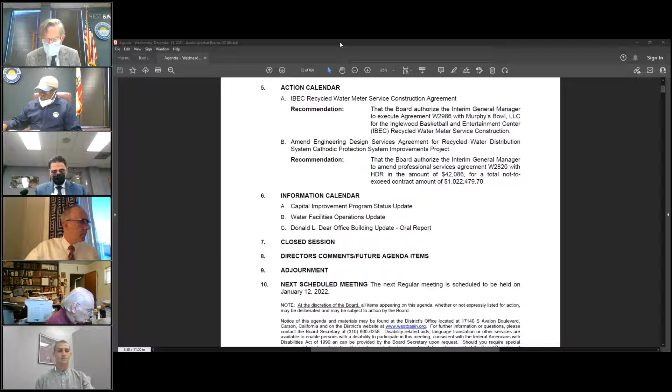Okay, let's move on to the action calendar. And the first item up is the Inglewood Basketball and Entertainment Center Recycled Water Meter Service Construction Agreement. So we will have a presentation on that, Mr. General Manager. Yes, Chairman Alvarez, I'm very excited about this item. As you mentioned, it is related to the Inglewood Basketball and Entertainment Center in the city of Inglewood. Obviously, West Basin is always working with our communities to expand the use of recycled water. And for this item, action item 5A, which begins on packet page 3, we do have Jeremiah Shea, who's our operations analyst, here for the presentation.

Thank you, EJ, and good evening, directors. I'm happy to present this action item for the committee today. We believe this is an exciting opportunity for the district to expand recycled water use in the city of Inglewood. And with that, I will jump right into it. So the Murphy's Bowl LLC is a developer associated with the Los Angeles Clippers basketball team. They have approached West Basin and asked us to provide a new recycled water service connection for the future Inglewood Basketball and Entertainment Center, or the IBEC site in the city of Inglewood. Recycled water is proposed to be used at the site for outdoor landscape irrigation, to supply cooling towers, and also for toilet and urinal flushing for a new recycled water annual demand of 40 acre-feet per year in the city of Inglewood.

In order to provide recycled water to the IBEC site, a new 8-inch diameter pipeline service connection must be constructed from the district's existing 36-inch pipe on Prairie Avenue. A map showing the location of this project is included on page 17 of your packet if you'd like to reference that. Due to the project's accelerated timeline with construction already underway in 2021, the developer has offered to perform the design and construction of the new service connection and also to pay for the expenses for the design and construction, with West Basin to provide design review and construction inspection services to ensure that the new service is constructed per West Basin standards.

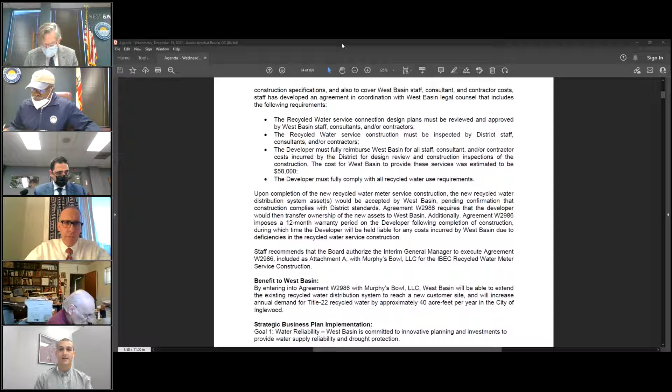Okay, thank you very much. President Williams, do you have any questions? Yeah. My mic. There it is. Is my mic on now?

Okay. It is. Yeah. And this project sounds like it's in alignment with what we want to do and with our recycled water system. The more customers we can get. What is the annual demand on this site? For all the recycled water use, right now we're estimating about 40 acre-feet per year, so it is a significant new demand in Inglewood. Yeah, well, I would definitely support staff's recommendation. That's all. Anything else? That's it. Any board members have any questions or comments?

Okay, so hearing none, my only question is really reiteration. I believe you said that all of the costs are going to be covered under the development agreement by the developer, and it's estimated at $58,000. But if they go over that, so be it. They'll still be covered. Correct.

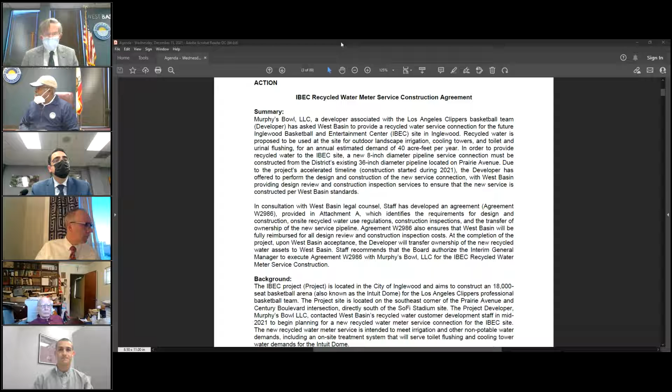Yeah. At the end of the project, we would submit all of our costs to the developer, and they would be fully reimbursed, even if that number is above the initial $58,000 estimate. All right. With that, then we will move this forward to the board. I concur. Okay. Thank you.

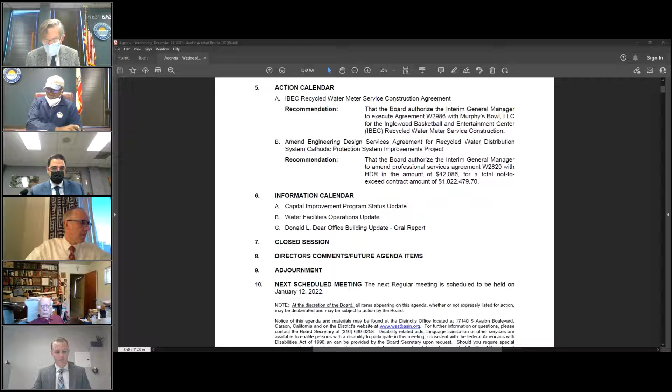Thank you. So next item is another agreement. This is an amendment to the engineering design services agreement for the recycled water distribution system cathodic protection improvement project. So, Mr. General Manager, do you want to tell us about that project? Yes, thank you very much, Mr. Chairman. As you mentioned, the item before you is item 5B, which begins on packet page 29.

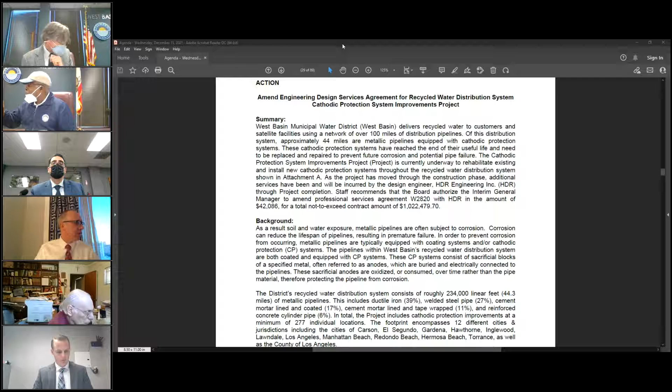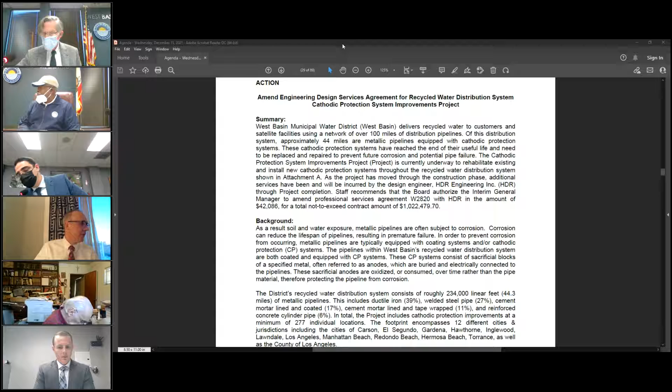The item is intended to amend an engineering design services agreement for recycled water distribution systems, the cathodic protection system improvements project. For this presentation, we do have Kevin Cullen, our engineering 2 project manager. Thank you, EJ. Good afternoon, Chairman Alvarez, members of the committee and board. As EJ mentioned, I'll be providing a recommendation to amend our existing engineering design services agreement with HDR Engineering for our recycled water distribution system cathodic protection system improvements project.

Before I dive into the memo, I'll just provide a quick high-level overview of what a cathodic protection system is. Essentially, a cathodic protection or CP system is a corrosion protection system. There are 2 types of cathodic protection systems, either an impressed cathodic protection system or a passive cathodic protection system. West Basin's recycled water distribution system is equipped with passive or galvanic anode cathodic protection systems.

These systems consist of sacrificial blocks of a specified metal, in our case magnesium, often referred to as anodes, which are buried and electrically connected to the pipelines. So these sacrificial anodes are oxidized or consumed over time rather than the pipe material, therefore protecting the pipeline from corrosion. West Basin Municipal Water District delivers recycled water to its customers and satellite facilities using a network of over 100 miles of distribution piping.

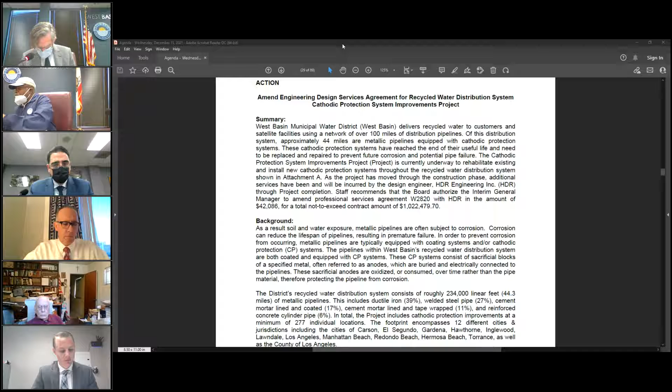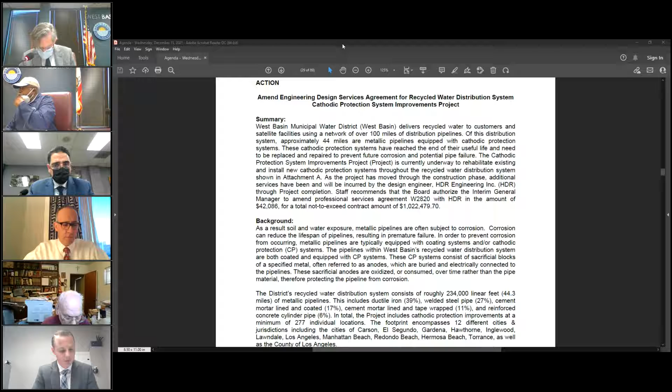In total, the cathodic protection system project improves our CP systems at a total of 277 individual locations and encompasses a footprint of 12 different cities and jurisdictions, including the cities of Carson, El Segundo, Gardena, Hawthorne, Inglewood, Lawndale, Los Angeles, Manhattan Beach, Redondo Beach, Hermosa Beach, Torrance, as well as the county of LA. And a map of the project site and impacted pipelines can be found in attachment A, which is on page 33 of the packet.

A little bit of background in the timeline for the project. The project was first kicked off in 2017 with a testing phase. The goal of the testing project was to gather enough actionable field data to inform a detailed design. So the testing was all completed in 2018. We performed electrical continuity testing, soil resistivity testing, and remaining anode life calculations for all of the existing systems.

Upon completion of the testing project, the board authorized staff to enter into agreement in December 2018 with HDR for the full design of the cathodic protection system project. The scope at that time covered a full range of services, including general admin, detailed site investigations, PDR, permit plan, design submittals at 60%, 90%, and 100%, bid phase services, engineering services during construction, as well as closeout services. The design was underway from January 2019 through August 2020, whereby we completed the design in August 2020.

It is worth noting that in June 2020, amendment number 1 was processed with HDR Engineering for some additional field testing that was not previously performed. This amendment was in the amount of $82,419 and was amended using the previously approved board contingency funding. In February of this year, we issued notice to proceed to a contractor, T.E. Roberts, for the construction of the project, and construction has been underway and progressing well.

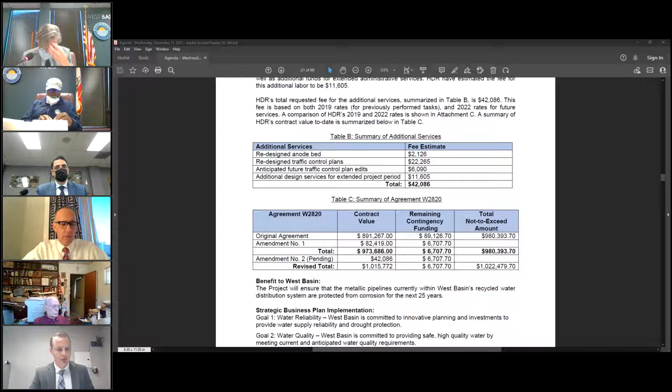As of right now, we are projecting an on-time completion in April 2022. So during the construction phase of this project, some additional services have been performed by HDR. A summary of the additional services can be found in Table B on page 31 of the packet. The additional services performed included a redesign of an anode bed detail, specifically at a location in Hawthorne. We ran into an underground tunnel system, which required the anodes to be laid horizontally rather than vertically.

There was also some training on a document management software that was required for HDR, as well as some traffic control plan revisions as required by the local jurisdictions. In total, HDR's total requested fee for the additional design services, as summarized in Table B, is $42,086. As well, a summary of the agreement W2820 with HDR Engineering can be found in Table C, also on page 31 of the packet.

It is also worth noting that staff does work with consultants to evaluate whether additional services are justified. HDR did inquire about other services as well, to the tune of about $70,000, which were respectfully rejected by staff and deemed to be in scope. So staff has worked with HDR and negotiated the fee for these additional services down, and is what you see before you today. So with that, I will read the recommendation.

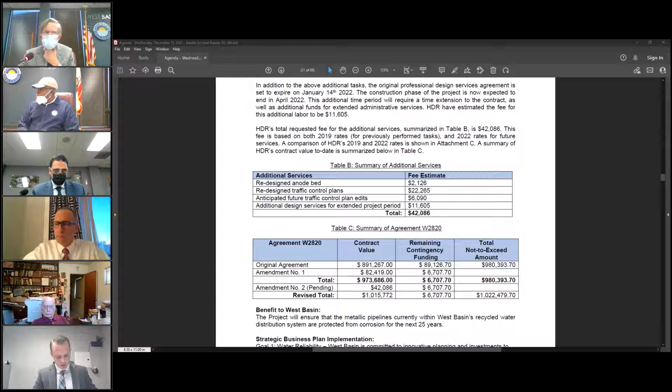The recommendation is that the board authorize the interim general manager to amend professional services agreement W2820 with HDR in the amount of $42,086 for a total not to exceed contract amount of $1,022,479.70. And with that, I'd be happy to take any questions. Okay, thank you very much. President Williams, do you have any questions?

The HDR's agreement, what is that for? Is that design services during construction or construction management services? What is that for? Hey, Director Williams. The existing agreement with HDR is for a full suite of professional engineering design services. So they've been on board with us from preliminary design all the way through design services, including engineering services during construction and closeout services as well.

Okay, now, as I recall back, this project had a CIP number. So where are we with this? Is it still under the same number? Because I didn't see that listed in the report here. I don't see a CIP number for this project.

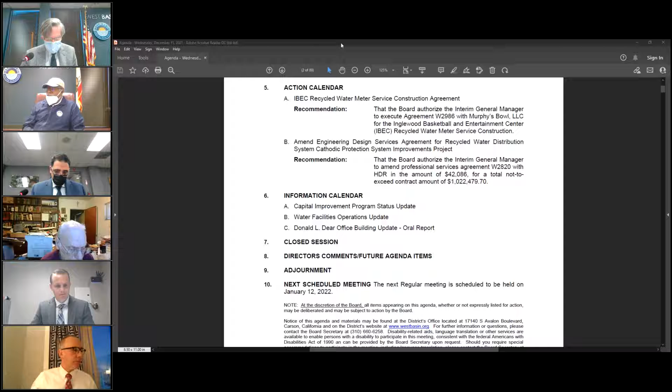All right, President Williams, what's your wish? I would move to staff's recommendation. Okay, so be it. We will then move on to the next item, which is item 6A. And yes, that's information calendar. The first item up is the capital improvement program status update.

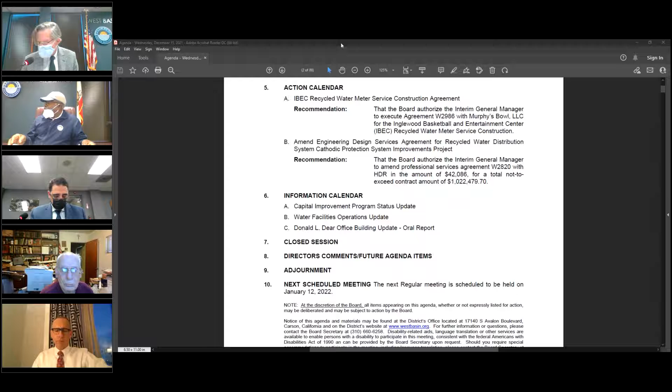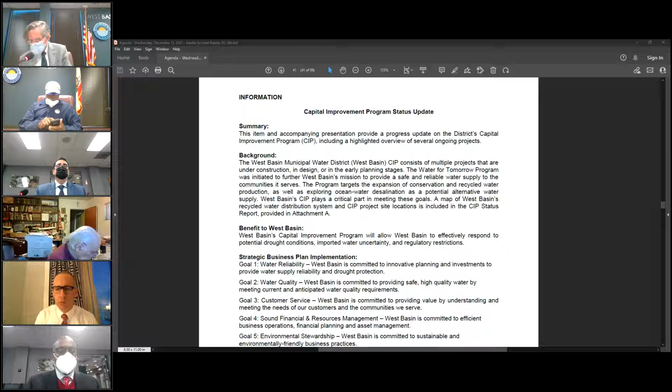Yes, thank you very much, Chairman Alvarez. As you mentioned, we do have item 6A, which begins on packet page 41, our capital improvement program status update. Before I hand it off to staff, I did want to make a few comments here in relation to the capital improvement program. With the request of our directors, I have previously sent out a couple of studies related to potential future capital projects. Some of them are quite old. One of which is the final report for the microfiltration reverse osmosis pilot test, which was conducted by West Basin Municipal Water District back in November of 2000.

There was also a pilot scale test of advanced treatment processes for recycled water for our joint plant that was conducted back in April of 2010. And I did forward that out to the board of directors, and I am going to be working with not only staff, but perhaps some of the consultants that assisted us on that as far as getting some more of the history. And so I wanted you to know that we will be bringing that back at a later date, possibly for a presentation, just to provide an overview.

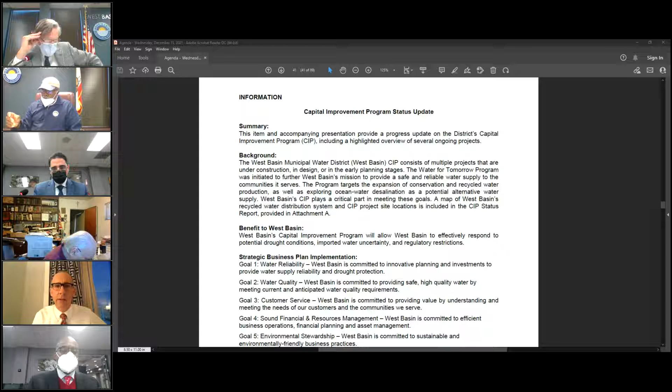Secondly, in relation to the capital improvement program status update that you have before you, you will notice that it is in a slightly different format. We were working with the members of the committee and with the direction from them to streamline this information, provide it in a quick and timely update, and really focus in on the progress being made. So with that, I'd like to hand this item over to Wendell Johnson, our manager of engineering.

Good afternoon, Chairman Alvarez. Everyone can hear me? Yes, we can. Okay.

Good afternoon, Chairman Alvarez, members of the committee and the board. I'm here this afternoon to provide a CIP program status report. Please turn to page 43 of your packet, and I would like to introduce you to a newly formatted capital improvement program status report. The department, under the direction of the general manager and the executive manager of engineering operations, has come up with a new format to present this work. This is considered a format that's a work in progress. And so we're really looking for feedback from the board through the general manager and through my manager to give us additional direction on the information that is being provided, as well as the format the information is being provided in.

Please turn to the next page, 44. Okay, and this is no longer an attachment. In the previous reports, we provided a map as an attachment. We have included this map along with the CIP status report. And one thing that has been eliminated was attachment B, which was an Excel spreadsheet that provided the CIP monthly update. So we left that particular attachment off. If we could turn to page 45.

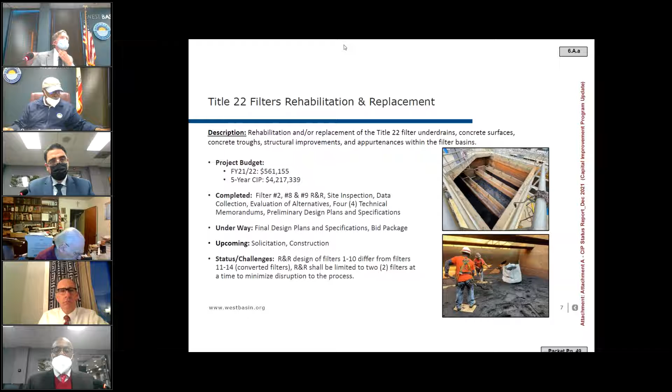In this particular case, we're saying that the R&R design of filters 1 through 10 differ from filters 11 through 14, which are the converted filters. The R&R is limited to 2 filters at a time to minimize disruption in the process, as that operation is producing the Title 22 water. And we move to the next slide, which is the Carson Phase 2 expansion.

This information is similar. And if there's any questions or any comments from the committee and from the board, I welcome your questions. If there's any of the projects included in the packet that you would like some additional detail on, I can provide you an update, and I have some of my staff on standby here if I'm not able to answer your question. With that comment, are there any questions? Thank you very much. President Williams, you have a question?

Yeah, thank you for the new format here. It's a lot better than the old one. I just want to say again, and you said earlier that you're going to correct this, that these projects that have been around for a while are identified by their CIP number, and that CIP number should run with the project from beginning to end. And the way you structured this again is better than before, but I would imagine it's going to keep getting better and better. And that's all I have for now, Mr. Chair. Okay, I guess I have a few questions.

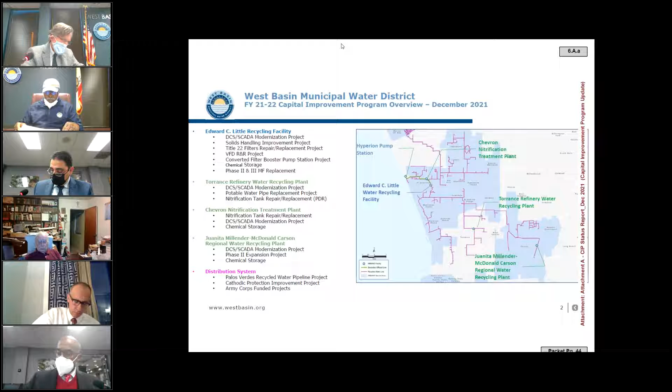So then the other thing I think we were looking for was the original cost estimates. For each of these projects, for example, if we look at the Juanita Millender-McDonald Carson Phase 2 expansion, the project budget, you say it's $18.5 million for FY 21-22, and the 5-year CIP is $21.1 million. What was the original estimate for the project back when you had a CIP number issued to it? What was the cost at that time, and how has the cost changed over time?

What I can do on these types of projects is we can put in the original fiscal year that the project was introduced to the CIP and what the estimate was. In this particular case, I'm believing somewhere in 2018 this project was originally conceived, but I can provide the budget information about the original conception of the project as well as the year that it was conceived in. Okay, that would be very helpful.

Yeah. So the date approved, and then how was it approved? So if it was approved, at what board action was taken to approve the project? And so along those lines, what would be really useful is the date approved, how it was approved, the approved budget. Then the budget spent to date, the remaining budget, and are you on track or is it over budget?

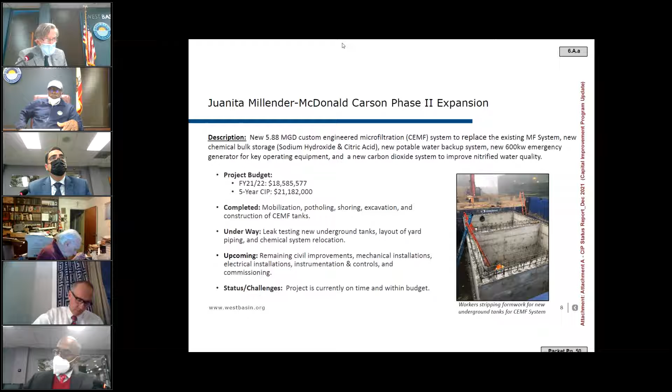And if it's over budget, when was the item taken back to the board to get a budget increase to accommodate the overrun? So those things would be helpful additions to what you presented today. Can I jump in there for a minute?

Yes, absolutely. Yeah, to me, the important thing here for the CIP projects, these are the projects that we're spending hard cash on, right? And this is what we want to keep up with, how we're spending on that. The program part of it, we've gone past that because we moved it out of program into project, the CIP list, actually spending the money. And this is the promise that we made to our constituents, that we are spending their money on project improvements. And this is what we want to show.

The programs are wonderful. We can't get anywhere without the program, right? And so we want to make sure that at the same time we are spending the money, it looks like we are spending the money wisely. Okay. Thank you. Okay, anything else, sir? Oh, I'm good. This is information, right? Correct. That's correct.

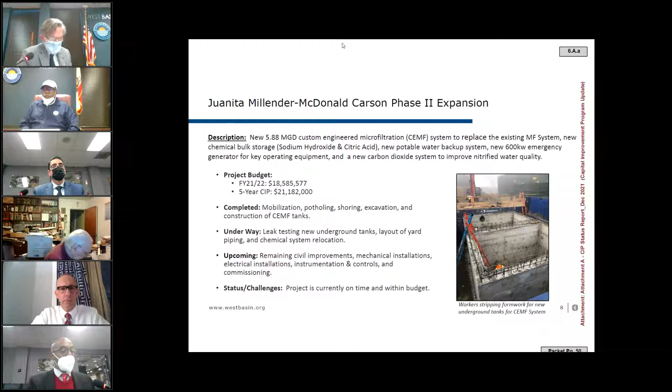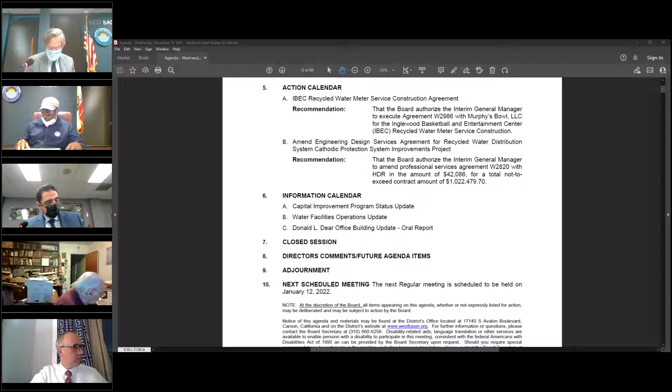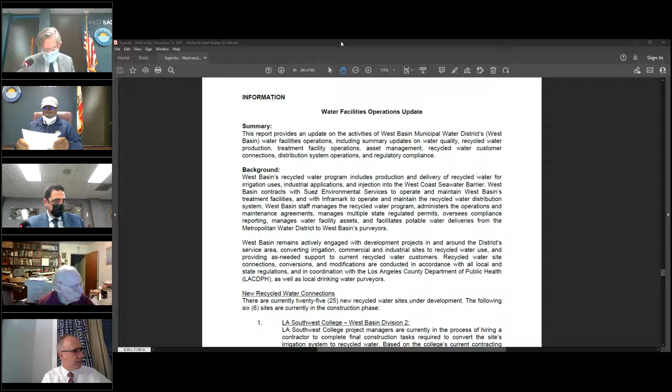Okay, so moving on with the agenda, we have one more present item. Actually, I think we have two more. That's correct. The water facilities operations update. So who's going to present that, Mr. General Manager? Yes, thank you very much, Mr. Chairman. As you mentioned, item 6B is our water facilities operations update. It does begin on packet page, I believe it's 61. And for this update, we do have Susanna Lee, our senior operations engineer, as well as Frank Fuchs, our operations supervisor. And I apologize, it begins on packet page 66.

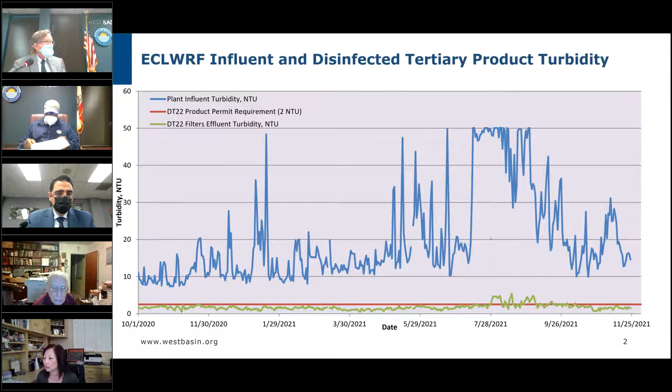So overall, the average for November was about 20. Compared to October, you can see the turbidity was a little bit higher. The good news is that we have met all of the compliance and permit requirements for our products, disinfected tertiary products, for the whole entire month of November. So overall, compared to prior to the event a year ago, as you can see on the left side of the graph, the water that we are receiving now is still a lot higher compared to previously. So going to the next page on 77, this is just a closer look at the influent turbidity for the duration of this event.

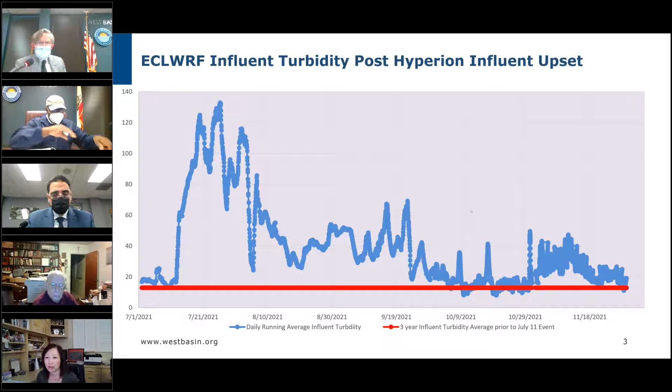You can see, as I mentioned, that for the month of November, the turbidity was significantly higher compared to the 3-year average of 13. So as we're heading into December right now, we are seeing that the water quality has improved compared to November. So keeping our fingers crossed that heading into the holiday season, it will remain that way.

We can turn to the next page, just a quick recap and look forward to what we can expect in the next few weeks in terms of the continued response to the Hyperion influent upset. In terms of water quality, as I mentioned, it has improved. However, it still remains higher than last year.

But I'm happy to report that we are gearing up for a barrier startup at the beginning of the year. So compliance staff is busy coordinating with the regulator on all the sampling and the startup plan scheduling. So we are communicating to the regulators that soon we will be beginning the delivery of water to the barrier system.

From the operational challenge side, as you're all aware, we'll continue to be challenged with higher chemical costs. Due to the improving water quality, we have reduced ferric chloride dosage as well as polymers and anti-scaling dosages. So I'm happy to report that has helped.

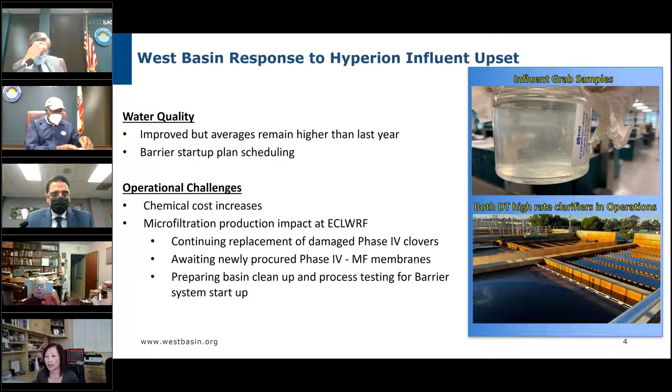On the next page, it's just some of the pictures, highlights of the maintenance activities. On the left-hand side, I'm happy to report that the influent pipe leak was repaired. We reported back in October that there was a pipe leak on the influent line, so that has been completed. On the bottom left is some PM on the electrical side of the assets. So we had a contractor come and do the check and cleaning of some VFD cabinets.

In the middle, you can see a picture of when the contractor completely cleaned out the pre-treatment high-rate clarifier. So the contractor actually suited up and went all the way down to the bottom and cleaned out all the solids and hosed it down. And so I'm happy to report that both pre-treatment high-rate clarifiers are completely clean and now in operation. And finally, on the right-hand side is some wiring repair work for the Chevron boiler feed decarb blower.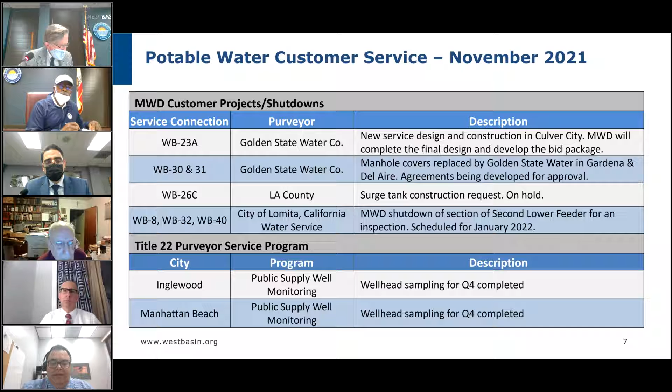This is page 83 of your board packet. And again, this is our monthly update for the recycled water distribution activities that are implemented by Influent, our distribution operator, with the exception of the site inspections that are noted at the bottom of the table. So for the month of November, we didn't have any leaks reported. However, Influent implemented monthly maintenance on air vacuum valves and exercised distribution system valves.

There were a significant number of water samples taken throughout the distribution system, still as a result of the Hyperion upset, but overall we have seen improvements in the water quality in the distribution system. There were a total of 744 underground service alerts that Influent responded to, and we also had a total of 22 site inspections that were implemented by our operations technician.

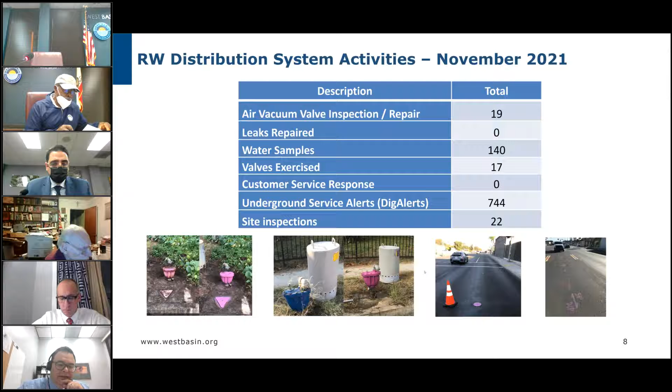And on the bottom photographs, the 2 on the left show maintenance that was conducted on air vacuum valves, just the before and after. And of the 2 right photos, one shows an example of a valve that was exercised, and the right shows the markings that Influent conducts for us for the underground service alerts. So moving on to the next slide, this is page 84 of your board packet.

And in this slide, we just wanted to highlight the recycled water site inspections that are conducted by our operations technician, Sergio Nunez. And these are for sites that are already connected to the recycled water system. So per our Title 22 permit to produce and distribute recycled water, West Basin is responsible to ensure that users comply with the guidelines for safe use of recycled water. And so as a result, West Basin conducts periodic inspections of each site. And we target sites to be inspected on a yearly basis.

But there are some sites that don't require yearly inspections, such as lower risk sites, for example Caltrans sites. And so we primarily want to ensure the safe use of recycled water. We want to prevent anyone from drinking recycled water. And so that also includes preventing cross-connections between recycled water and potable water. We also want to prevent any uses that are not approved specifically for that site.

So when conducting a site inspection, our operations technician will have a set of plans of the recycled water system for that site. He has a checklist, and he's going to go through and make sure that there's sufficient signage at all points of entry. He's looking for areas where there may be ponding of recycled water, such as the photograph on the top right, which is not allowed. He's also checking for appropriate backflow protection on the potable water system.

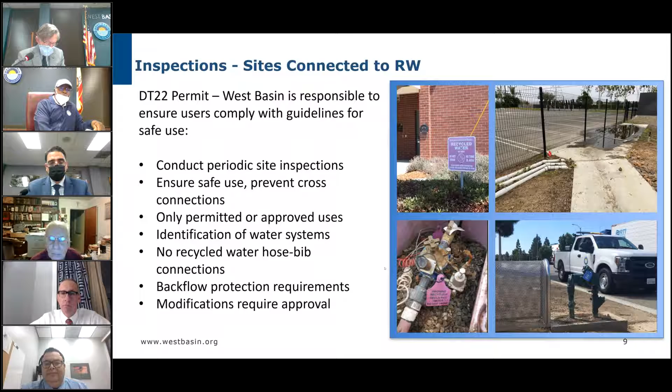So this is slide page 85 of your board packet, and this is going back to new recycled water sites that we work with to connect to the recycled water system. Before they can actually be connected to recycled water, we work with the Department of Public Health to ensure that the site owner or the contractor is installing everything per Department of Public Health requirements. These are some of the photographs of the irrigation system that was recently installed at the Hollywood Park Retail Phase 1 in the SoFi Stadium development. This site is expected to be connected in April of next year. Moving on to the next slide.

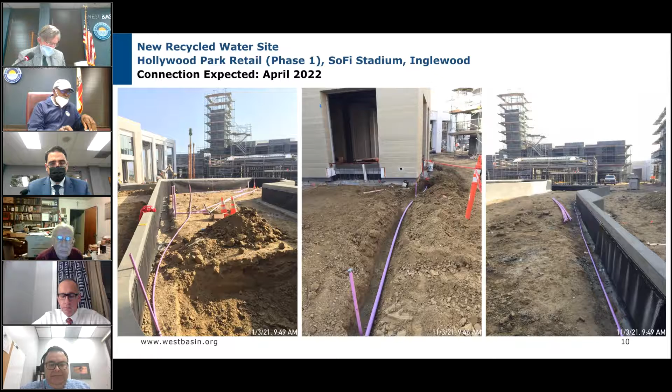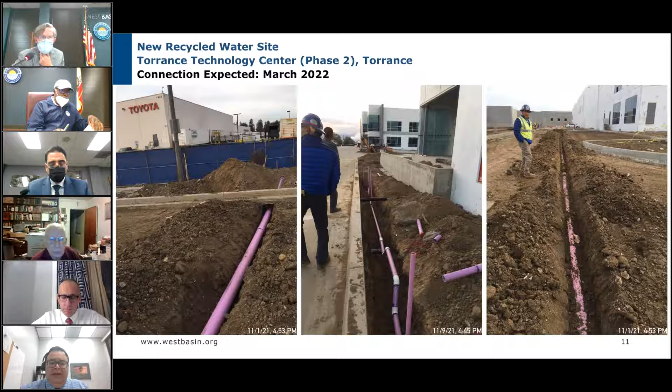This is page 86 of your board package, and this is for the Torrance Technology Center, the second phase. This site is expected to be connected in March. And again, similarly, these are photographs of the new irrigation system that was recently installed that both the Department of Public Health and West Basin staff inspect as well. And then the next slide, please.

This is our monthly update of the Topgolf site. This is adjacent to the Edward C. Little treatment facility. Staff is continuing to inspect the irrigation system. There's a portion of irrigation that is being installed around the facility on the right side. So staff has been going out to conduct inspections of the new irrigation, which is anticipated to be completed in March of next year. And then the next slide.

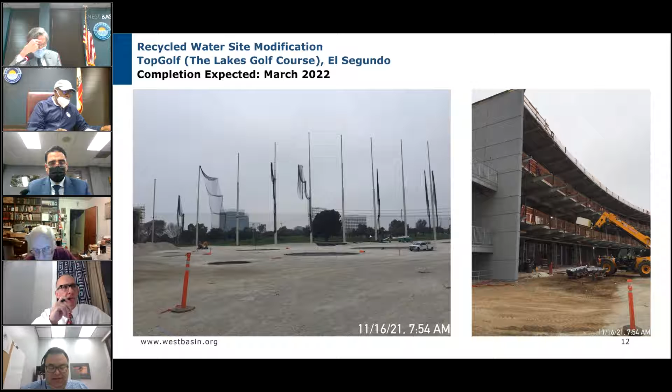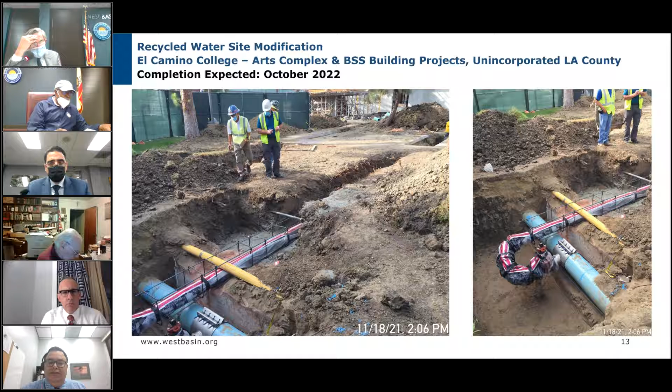This is page 88 of your board package, and this is for an existing site. El Camino College is a site that was already connected to recycled water. They notified us that they were going to make modifications, in this case to the potable water system. So we worked with them to get approval for all these modifications, to update their plans, and work with the Department of Public Health to inspect these to make sure that they're labeled appropriately, and of course that they're not interconnected with any recycled water at the site. This work is expected to be completed in October of next year. And that concludes our update, and we're happy to answer any questions.

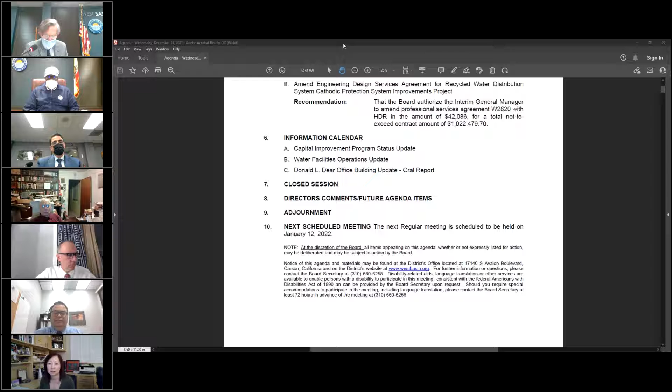But in terms of the water quality they're delivering, it's pretty stable now? The last couple of weeks, yes. You saw the graph earlier. For a good 2 weeks of November, we were still seeing the peaks and valleys. The last couple of weeks, we're seeing tighter bands, hovering around 15 to 20. So we are averaging lower. Okay, because it seemed like it's getting pretty close to that 3-year average line that you track against.

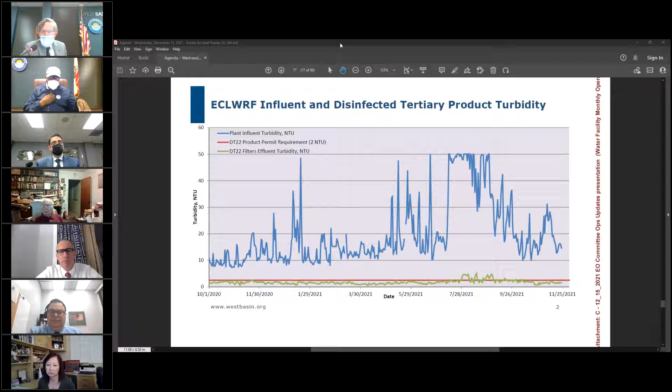Yeah, if you go to the next slide, yes, we're pretty close. In terms of stability, like I said, these last 2 weeks we are seeing more stability, and we didn't see those high peaks that we saw back in November. But if they turn on another unit, we may see those peaks again. Okay, thank you. Any other board members have any questions?

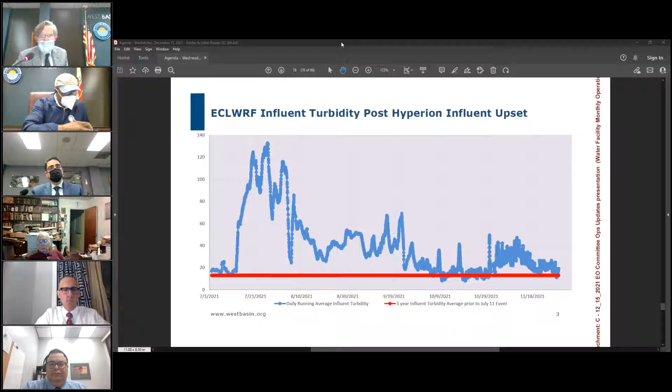Okay, seeing none, then we'll move on. We have one more information item, and that's the update on the Donald Dear office building. So, Mr. General Manager. Yeah, thank you, Mr. Chairman. As you mentioned, the item before you is 6C. It's just a brief oral update. I had a chance to discuss this with at least one of the committee members, so I thought I'd bring it back just to provide a quick overview.

As you might recall, back in August, staff did bring an item to this committee related to the Donald L. Dear building, the potential needs with the existing facility and potential future needs. At that time, it was the direction from this committee for West Basin staff to pursue an appraisal of the building. On August 23rd, we did issue a request for proposals. We were able to receive those proposals on September 2nd. You might recall that we did bring this before the committee later that month to talk about the proposal. It was approximately $10,000, I think a little bit more.

And because of that, staff engaged the appraiser and discussed potentially altering the scope of work. On October 7th, we were able to get a slightly reduced scope. We eliminated 2 of the specific items related to the analysis that they would provide. We were then able to check that proposal just to make sure that we were comparing apples to apples and that the proposal was decently priced. We thought it was, and we finalized that scope on October 25th. And I was pleased to announce that we actually received the executed agreement with that firm on November 9th.

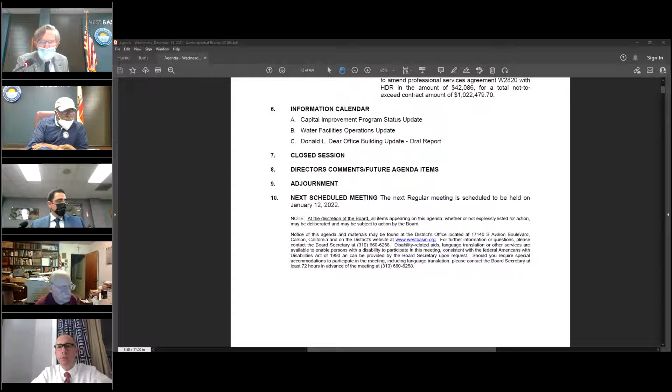I'm a little surprised how long it's taken to get this appraisal done. I thought we'd be much further along, but I'm glad to hear that it's finally moving and that we'll have something next month. So any other questions or comments from any other board members? Okay, seeing none, then moving on our agenda, next item's closed session. We do not have one today.

And director's comments. So do we have any comments for future agenda items? President Williams. None. Other board members, do you have any comments? I just have a question of the manager. Do we have a meeting tomorrow at 2 o'clock, an ad hoc committee? That is correct. We do have a Desal ad hoc committee meeting tomorrow at 2 p.m. Thank you. Okay, any other comments? I don't have any comments. I'll be providing some suggestions for our next E&O committee meeting agenda, but I don't have those at this time.